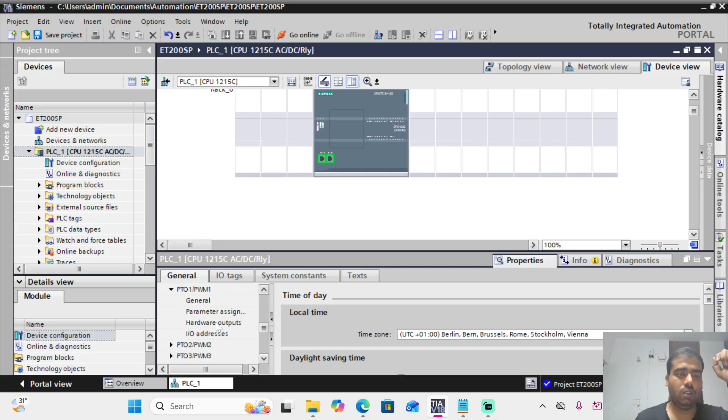Ethernet address. Now in Ethernet, add new subnet, and this is my IP address 192.168.0.1, and this is my PLC IP address.

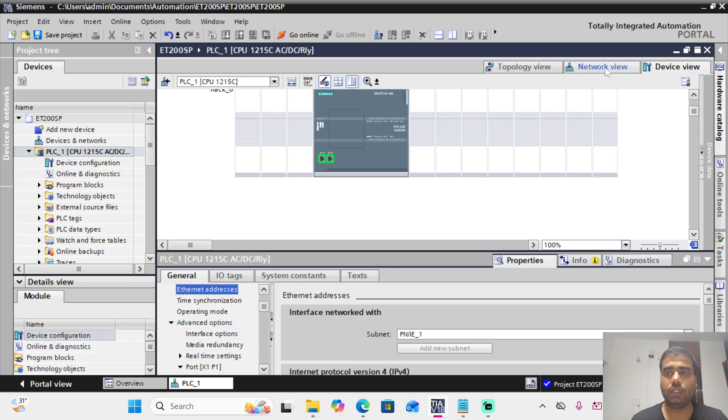Next, in network view, we are moving to network view and go to hardware catalog, and after that we are going to distributed IOs, and in distributed IOs we are searching for ET200 SP. This is my interface module, and now we are going to interface module, and right now we are using for PROFINET communication, so we are going to PROFINET communication.

And my hardware is the hardware, if you are using, this is my hardware right now. So this is my hardware, IM155-6 PNST. This is a SIMATIC ET200 SP, and in this hardware there are some detailed information.

So we are now going to ET200 155-6 PN ST. This is my hardware, ET200 PNST. So this is my hardware. After that, three details are available, three modules are available, and our module is this 6AU02-0BN0. So we are selecting the correct module.

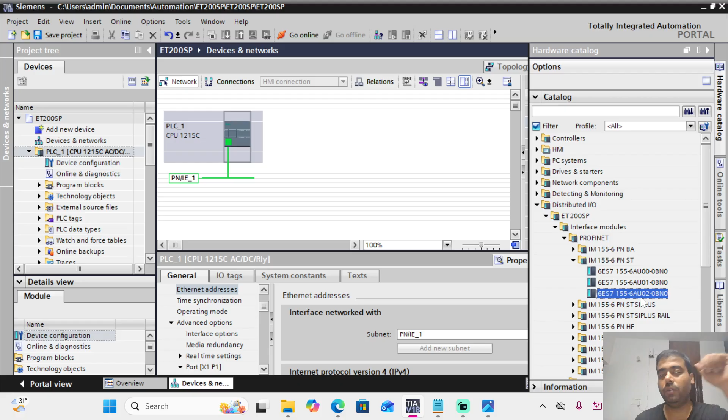This is my distributed IOs PROFINET IMs 155 module. So double click. Now I double click on this for selection, this is my ET200 SP.

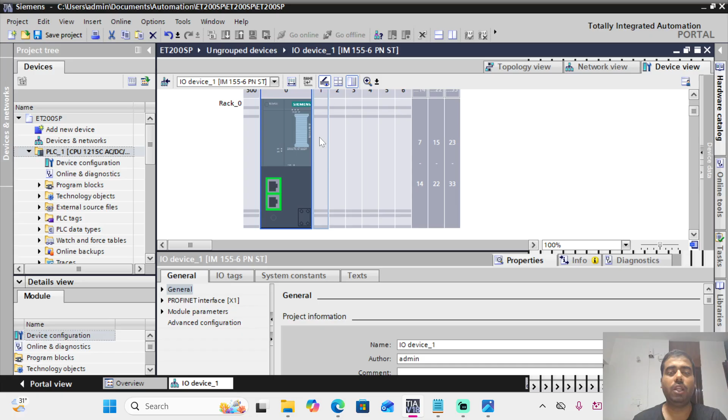After that, need to select input, output and server module. So what is my input? Here we can check, this is my input module DI, 8 into 24 volt DC, and this is my MLFB number for Siemens.

So we go to hardware catalog, ET200 SP, and first of all I select my DI, because this is hardware mainly related to software. So as it is, we are using hardware install, just like we are using in our TIA Portal software. So first of all my DI is installed.

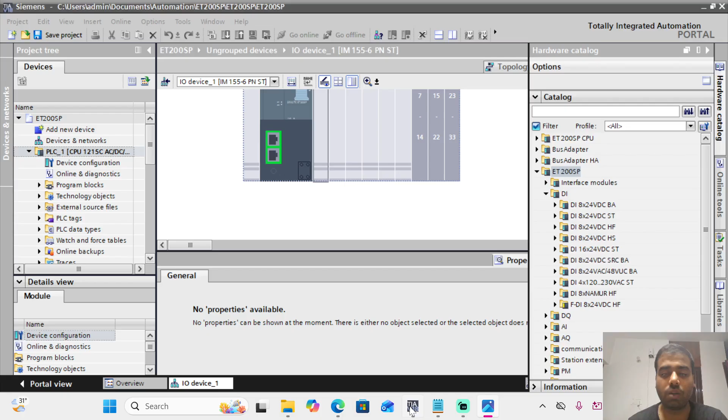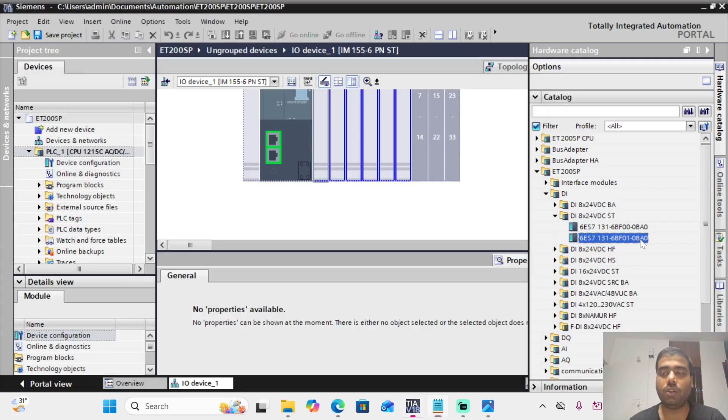So same concept we apply in DI 24 volt DC ST, and right now we are checking which one is our exact module, F010BA0. So you can see here, 6BF01-0BA0. So this is my DI module. Right now, drag and drop to the particular location.

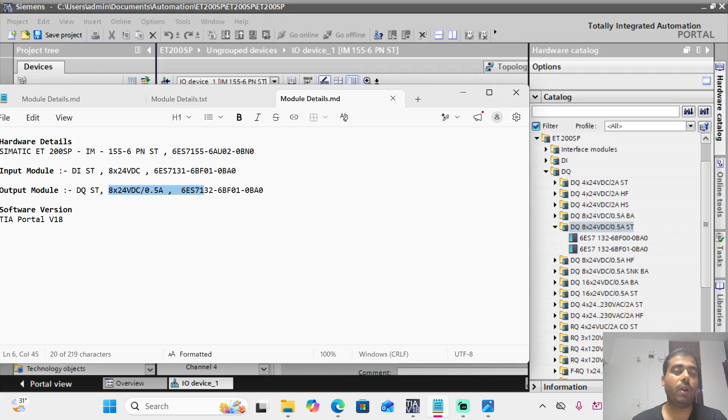So exact location. After that we are selecting DQ, digital output, same just like 8 into 24 volt DC 0.5 ST. This is another, DQ ST 8 into 24 volt DC 0.5A, and this is my MLFB number. So right now we are using F01, this is F010BA0. So we are selecting this DQ output.

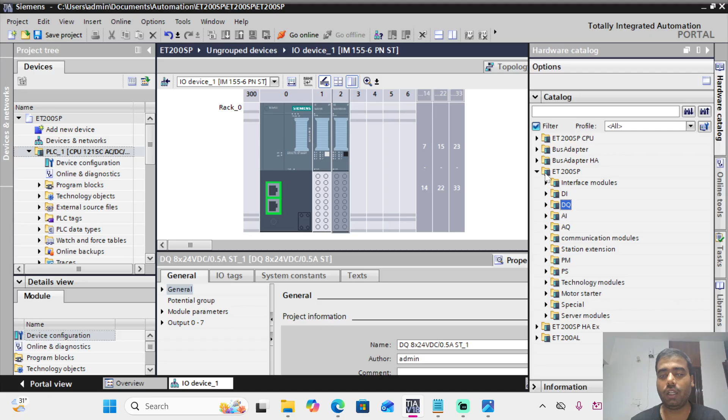So we need to do the same, this is input, after that we are installing output, 8 into 24 volt DC, and same MLFB number we are using. Same order we install, and after that, if your DI DQ is finished, the last is the server module for termination.

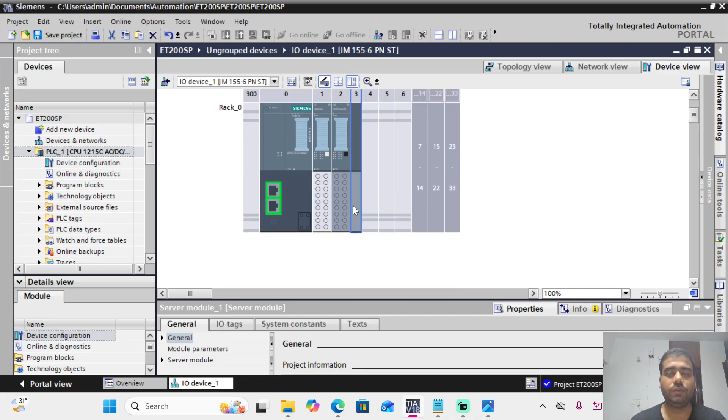यहाँ पे हमने सर्वर मॉड्यूल और डिस्ट्रीब्यूटेड आईओ इंस्टॉल किया है, जिसमें एक DI और एक DQ (डिजिटल आउटपुट) लिया है, और सर्वर मॉड्यूल से एंड किया है। यह डिपेंड कर सकता है मल्टीपल इनपुट आउटपुट पे, बट प्रोसीजर और कॉन्सेप्ट सेम रहेगा।

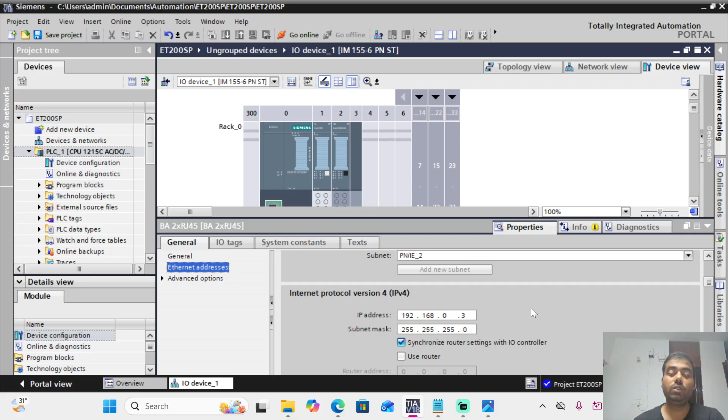First we select Ethernet address and other parameters. Double click on the ET200 SP module, this is the Ethernet address, add new subnet, and select IP address. 01 मेरा PLC का एड्रेस है, सेम IP एड्रेस यूज नहीं कर सकते, तो उस सीरीज का मैं अनदर नंबर प्रोवाइड करता हूँ 03। तो ये मेरा IP एड्रेस असाइन हो गया है।

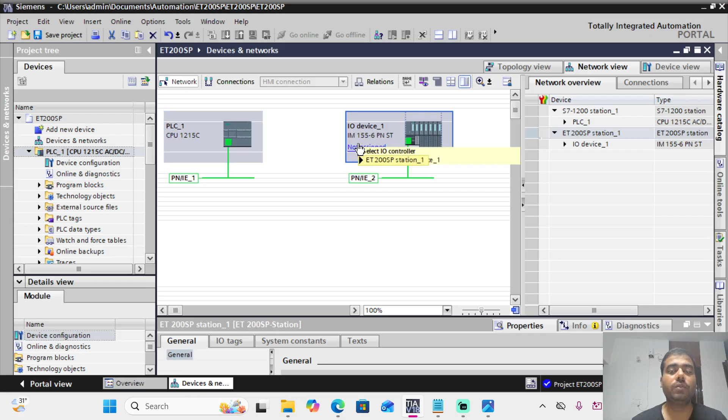Okay, so again we go to network view. अब नेक्स्ट नॉट असाइन पे क्लिक करेंगे और प्रोफिनेट कम्युनिकेशन स्टेब्लिश करेंगे। सो ये मैंने पीएलसी पे क्लिक किया, कम्युनिकेशन स्टेब्लिश कर दिया है।

सो दिस इज माय आईपी एड्रेस 192.168.0.1 PLC IP address, and this is my 192.168.0.3, this is my ET200 SP module. तो दोनों के बीच में हमने प्रोफिनेट कम्युनिकेशन स्टैब्लिश कर दिया है, लेकिन अभी बीच में मेरे को कुछ और करना पड़ेगा।

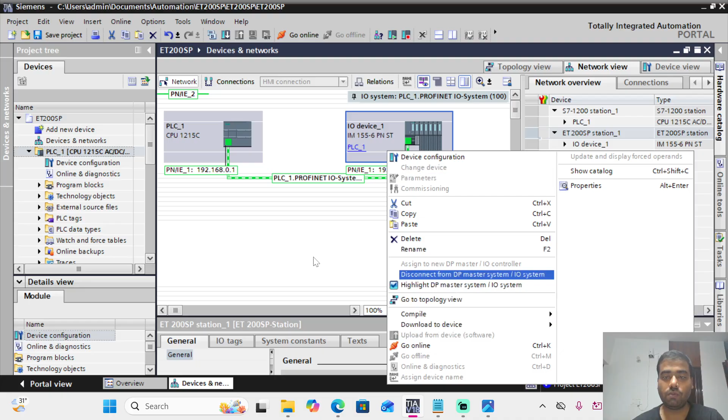Next, जब तक ये सिस्टम मेरा काम नहीं करेगा, so I select this, ET200, right click, and we are setting assign device name. Without device name we cannot establish communication, because PLC doesn't know which device, especially if multiple distributed IOs are using, so we need a proper device name.

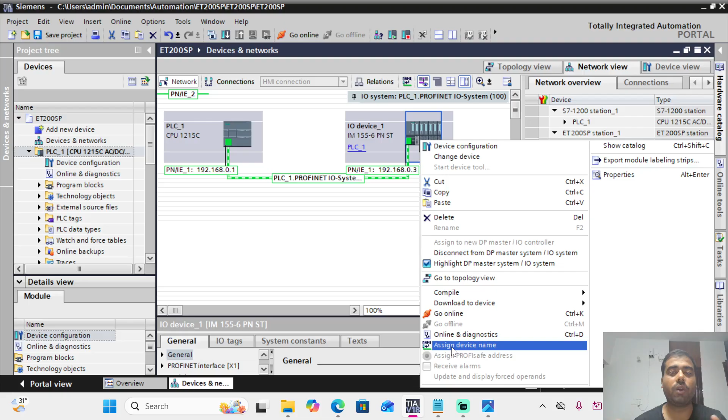Device name के बगैर communication नहीं हो सकता, PLC don't know, because if we are using multiple distributed IOs and multiple communications like Profibus, Profinet, IO link, so device name is very important.

Now we select device name. Wait few minutes.

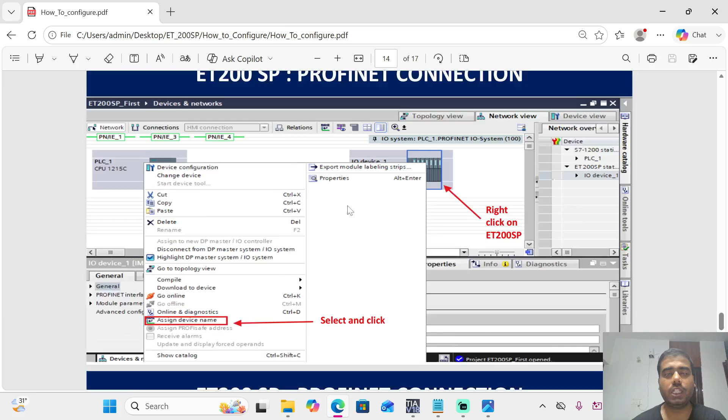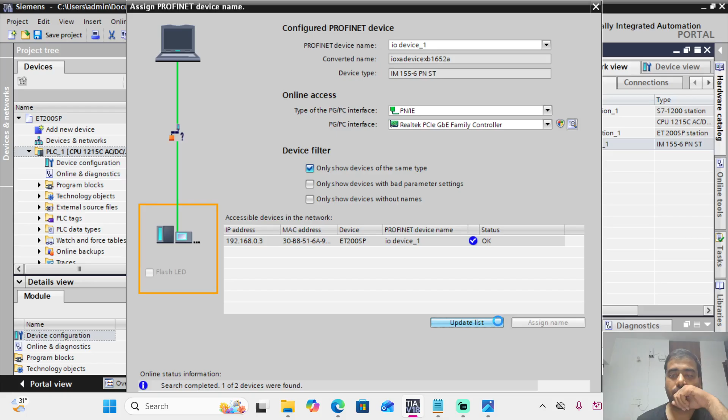So this is device name. Right now we go to update list. The PLC by default creates one device name, so we can use this device name. ET200 SP device is IO device 1. This PROFINET device name and IP address is 192.168.0.3, so this is correct, update list. Okay, so cancel.

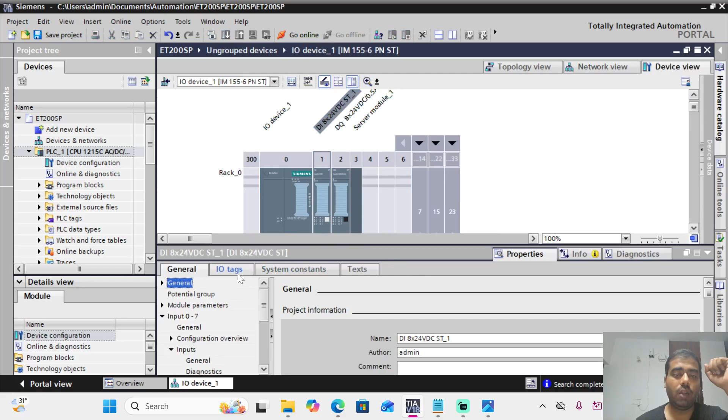After that, if you check here, जैसे ही आप इसको डिवाइस नेम देते हैं, IO tags देखेंगे, IO tag address डिफाइन कर दिया है, 0 से 1 आपका PLC का, उसने input output address डिफाइन किया है। तो input के लिए जो address PLC use कर रहा है वो 2.0, 1, 2.3, 2.7, और output के लिए अगर देखें तो output के लिए IO tags Q.2.0, 8 चैनल का है तो 2.7 तक use कर रहे हैं output address। तो यहाँ जो भी ET200 का input address है वो 2.0 से 2.7 तक, आप यहाँ कोई भी नाम डायरेक्ट डिफाइन भी कर सकते हैं।

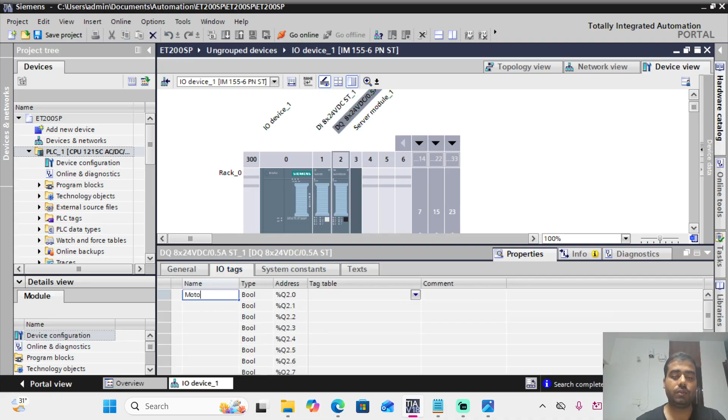सेम output पे भी IO tags पे कुछ भी डिफाइन कर सकते हैं। ओके, सो मेरा ये कम्युनिकेशन network view में जाते हैं तो कम्युनिकेशन एस्टेब्लिश हो गया। नाउ वी आर सेव एंड कंपाइल।

Compilation. This is a very basic and simple method for PROFINET communication in Siemens TIA portal. Now you could download.

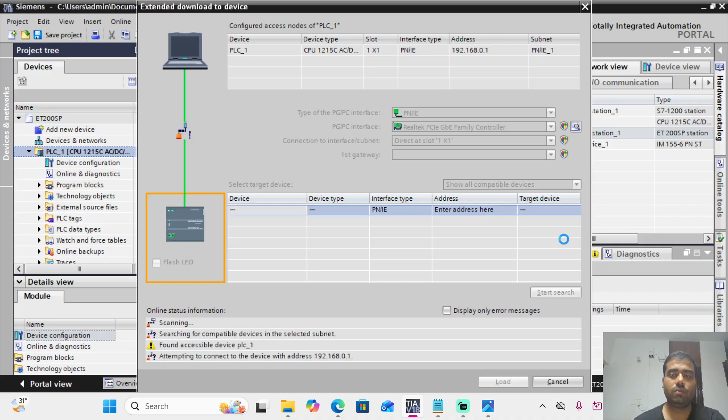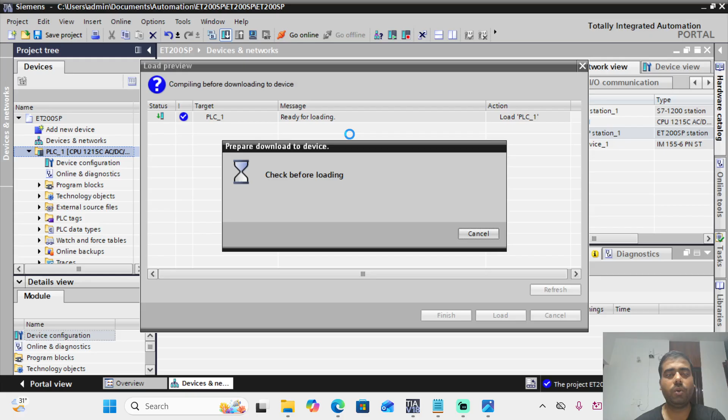Okay, this is my PLC. I select and load. After that download, we check in online mode what happened with communication.

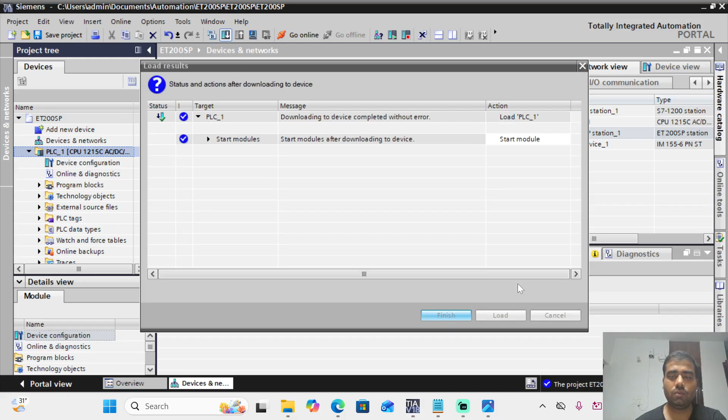So program is downloaded. Let's check what happened. So go to online. If this is both are green, you can see here all are green, so that means communication is established.

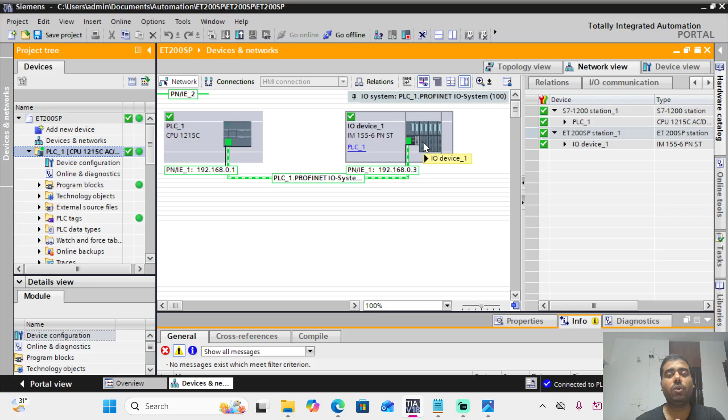If there is any error in communication, this is not green, meaning my ET200 SP is communicating with PLC. If I give any input output address to command, they are totally working. So this is my short and simple method to explain ET200 to S7-1200 PLC communication.